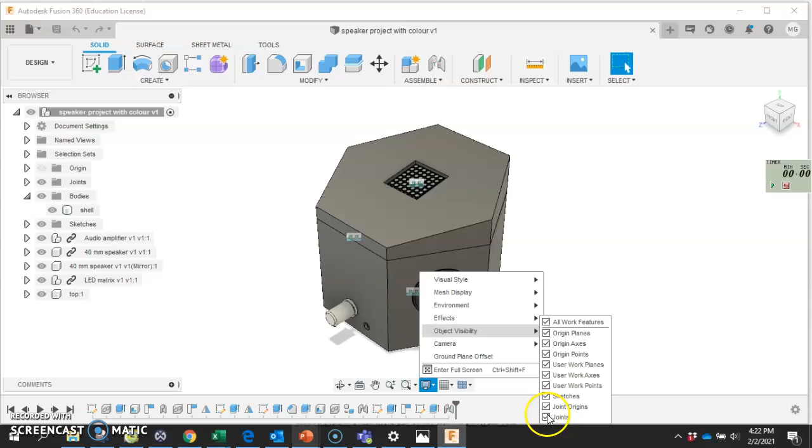There's a small TV here. You can select object visibility and turn off the joints. Next thing, we are going to modify the appearance.

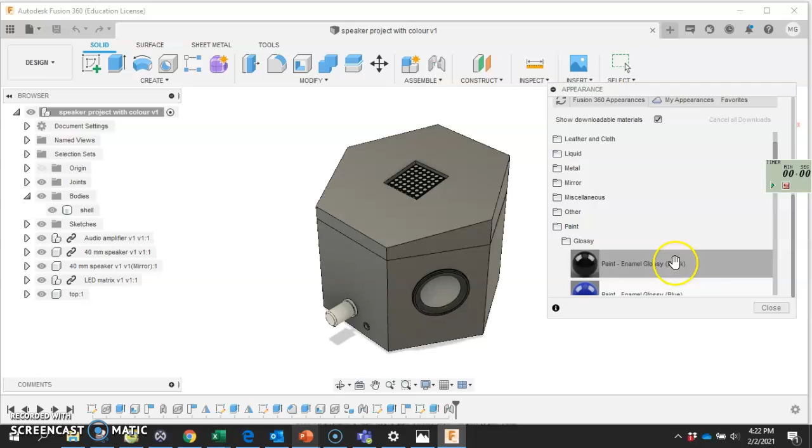From the appearance menu, select Paint, glossy, and we're going to color this like the UAE flag. So let's select the top, and we shall make that red.

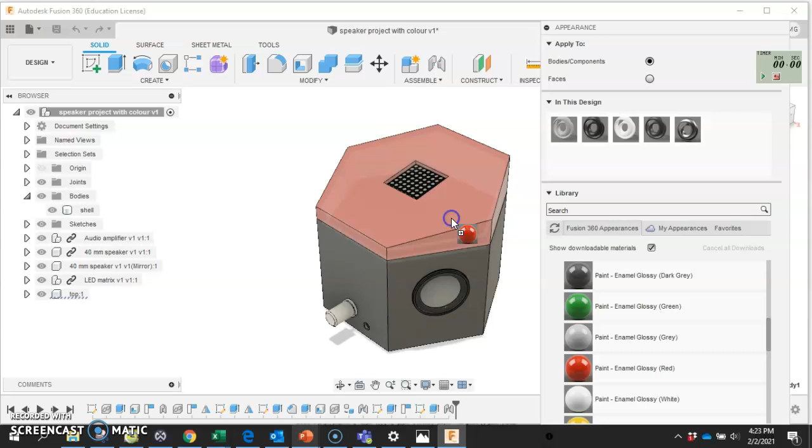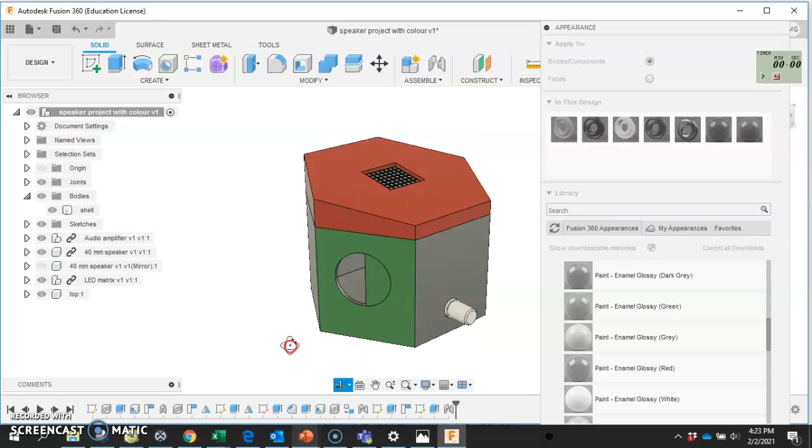I'm going to select this face and we will make that green. I'm just going to turn off that speaker and do a quick extrude.

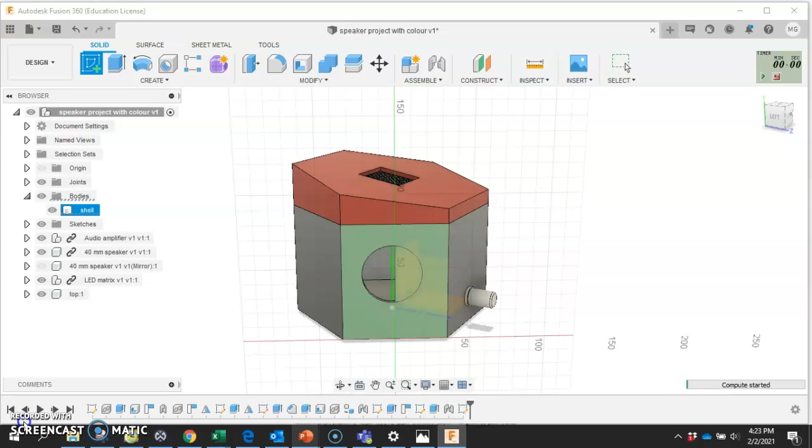We can create a sketch on here, to create a circle, and I'll just put it anywhere there. The diameter of that, I believe, is 40.

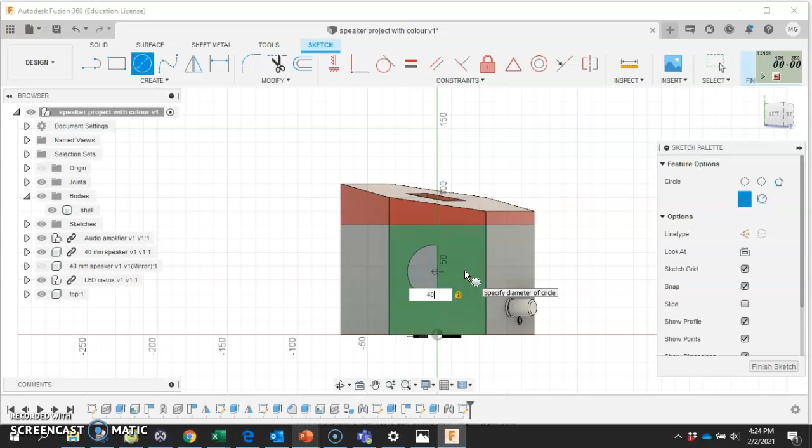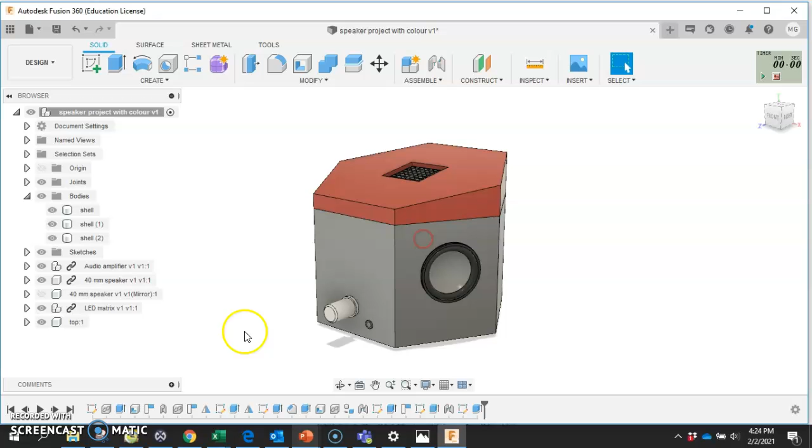And I'm going to extrude that small piece. Turn my speaker back on. Okay, now I want to make - just going to check that speaker. Let's turn that off. That one's okay.

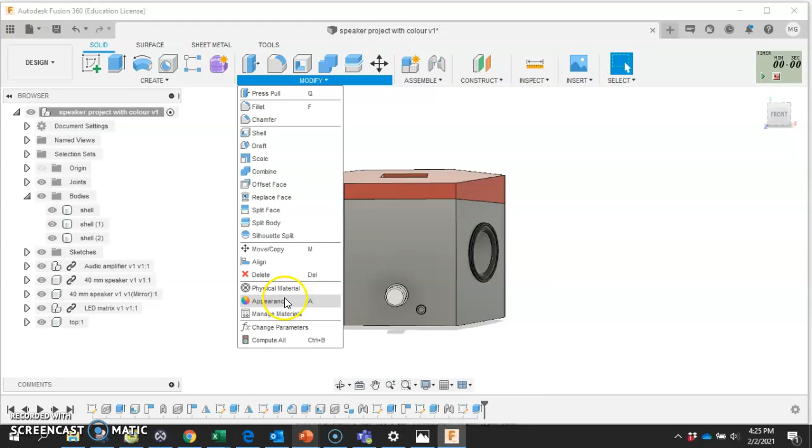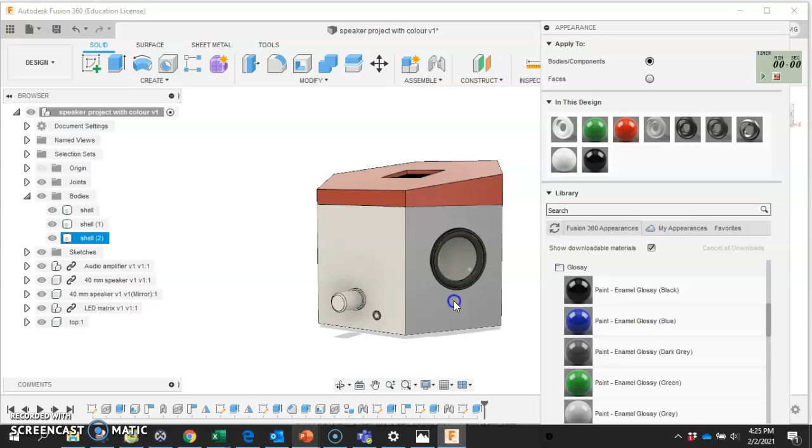Modify appearance. Again, paint, glossy. We'll make this face white. This one, I want black. Green. White.

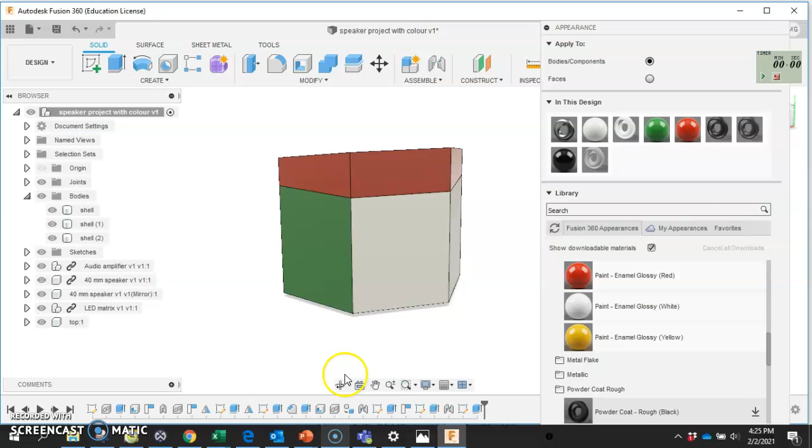Remember, you can use your orbit to move this around. You can zoom in and out. And the final one here will be black.

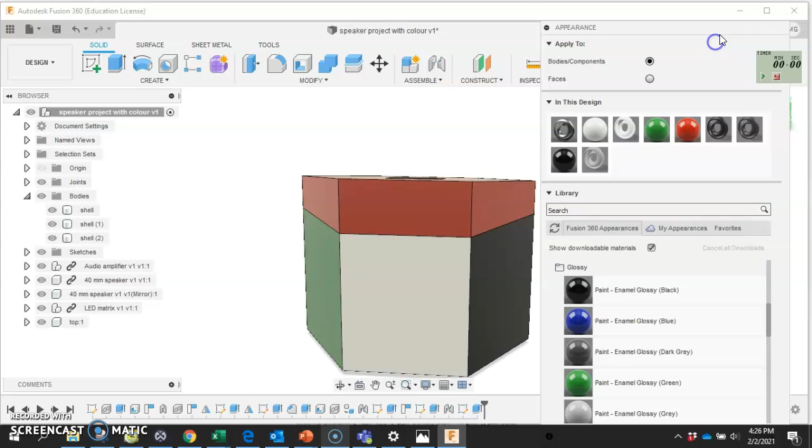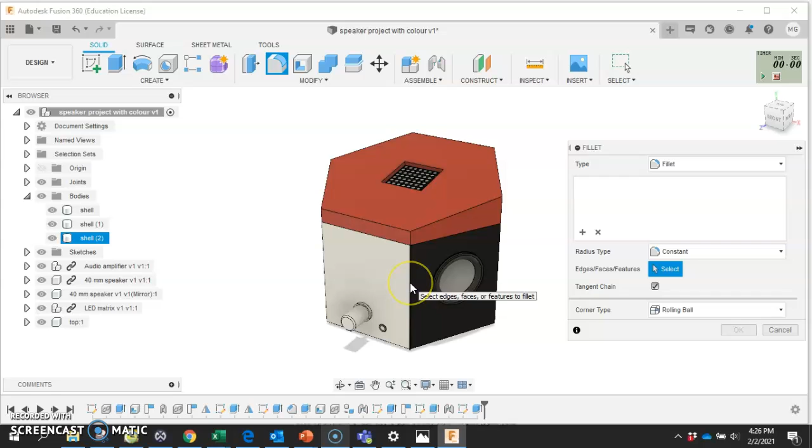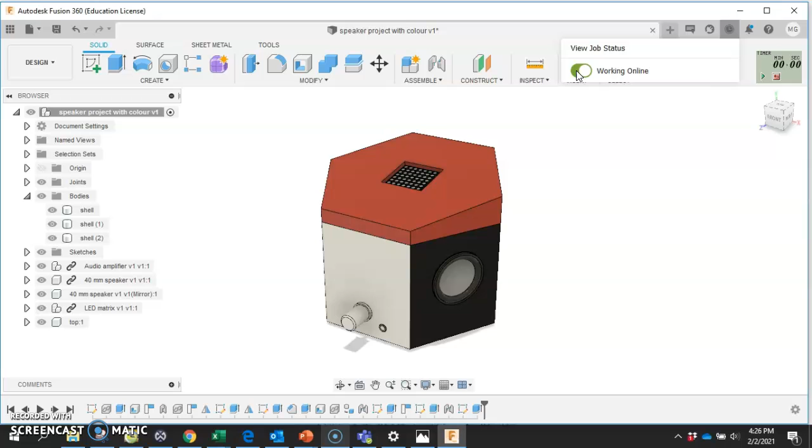Select Fillet and select all the sharp edges. Remember, if you get this message, check again, continue, continue, then select the job status and work offline. When we save this later, we will go online.

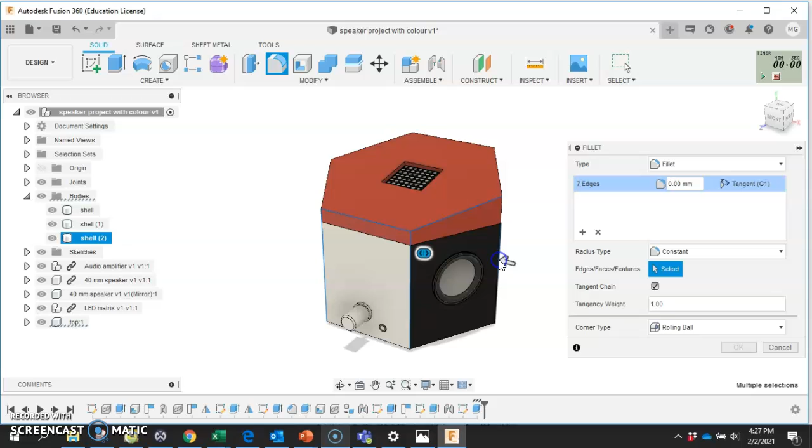Again, fillet. Select all the sharp edges. You should have 7 edges selected. You can enter any value you like. Let's try 2, 3, 5. I'm happy with 5.

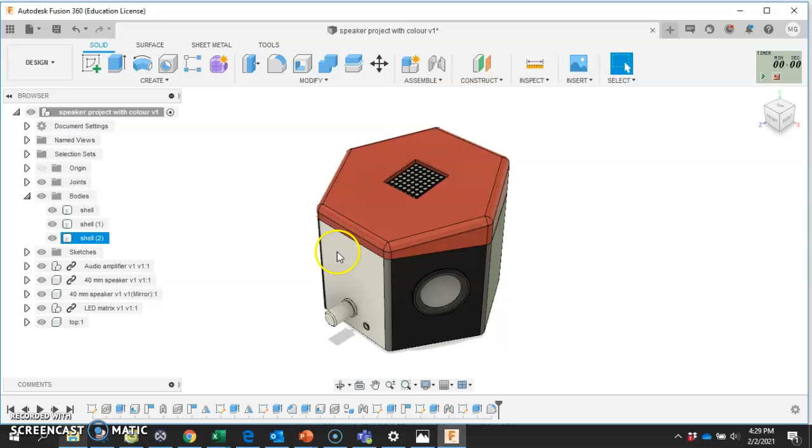Return home. And the last thing we need is to put a picture on here that connects this speaker with Arabian music. So in Google, I have searched for images of Arabian instruments.

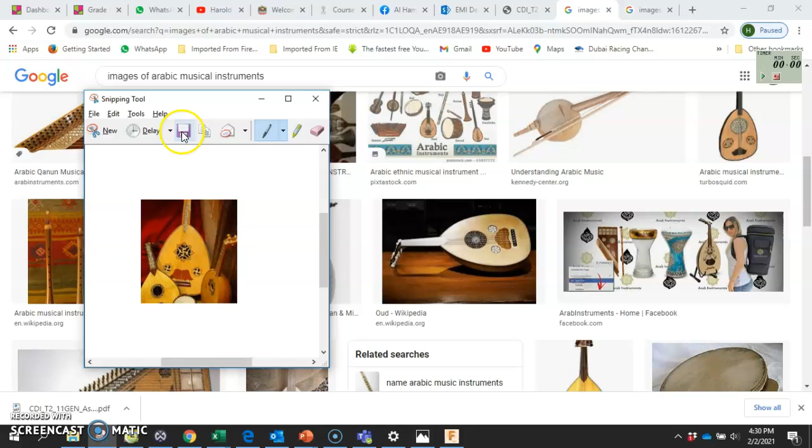Use your snipping tool, take a picture and save it to your machine. Remember where you save it, so mine is in Screenshots 11 General 2. I have one saved there already, so I don't need to do that.

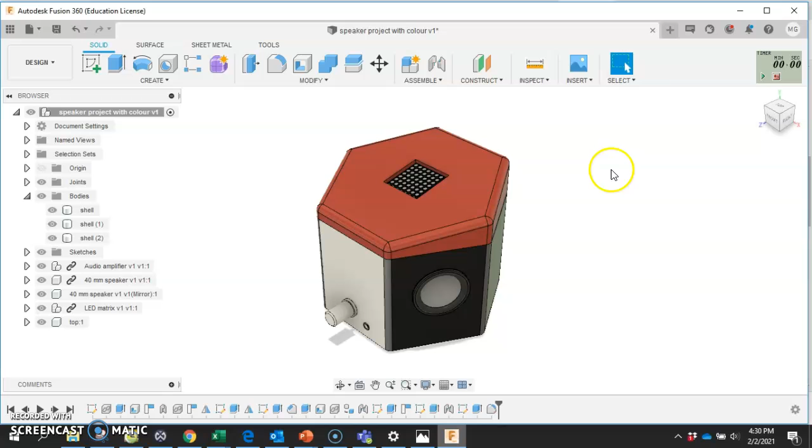Return to Fusion, insert decal, insert from my computer, select your picture, select the face.

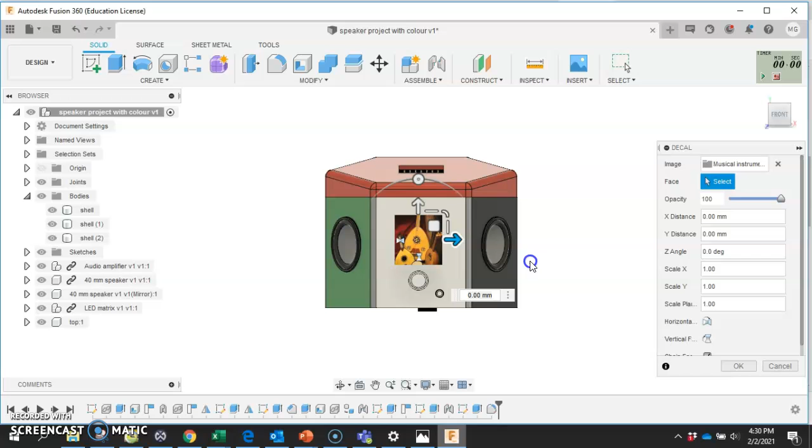And you can move that around. You can make it bigger or smaller. I'm happy with that. Press OK. Return home. You now have a speaker which shows the Arabian culture, has the UAE colors.

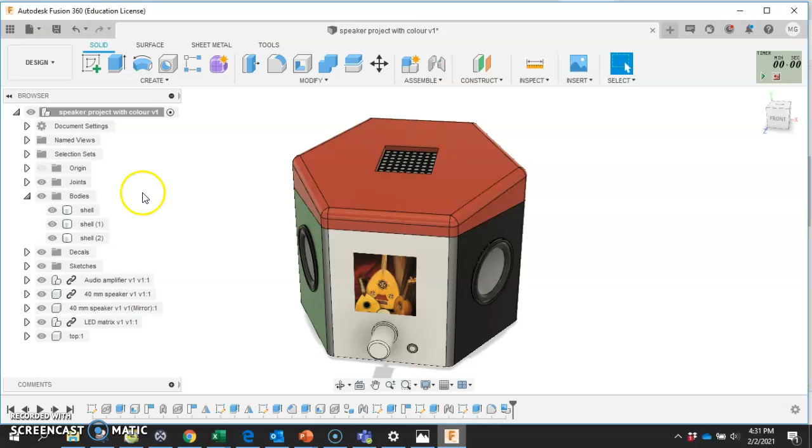Take a screenshot. Make sure you include the timeline. So the timeline is at the bottom. That's all your work. And paste that into your Word document.